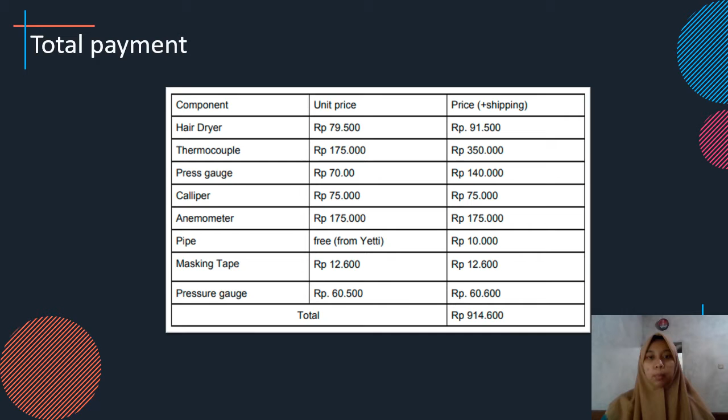As you can see in this table, this is the main component we use in our experiment. Most of them we purchased offline, especially the thermocouple, pressure gauge, caliper, and anemometer. From the table, there is the estimated price of each component with shipping costs. In total, we spent around 914,600 rupiahs. This cost excludes the shipping from one group member to another group member.

Then why did we choose a hairdryer for our experiment? Because a common hairdryer makes an excellent example of an open thermodynamic system. This figure shows the energy terms that are involved in the first law of thermodynamics. For a steady state condition, the total energy in must equal the total energy out.

In this lab, the students attempt to measure all of these energy terms and then compare the electrical work at different velocity and temperature. In our group, we did the experiment with different levels of velocity and temperature of the hair dryer. Basically, the hair dryer has 3 levels of speed and temperature. Because each of us has different electrical capacity in our house, we did it differently. I use the medium, Dara the high level, and Fitri the low level.

Second, the energy into the hairdryer includes the electrical work, the total enthalpy of the incoming air, and the kinetic energy of the incoming air, and there is heat transfer from the case to the ambient. This type of heat transfer is called convection. So for the heat transfer phenomenon, we will observe convection that happens inside the pipe.

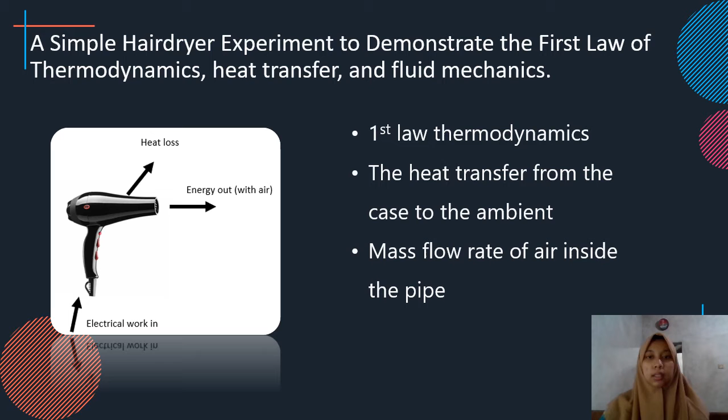Next, the energy out of the hair dryer is in the form of air. Then we will analyze the mass flow rate inside the pipe that will be installed on the hair dryer. As you can see in this picture, this is the assembly of our hair dryer experiment. We just need a hair dryer and a pipe.

And this is the step to assemble the hair dryer experiment. First we cut the pipe to 32 centimeters and then connect the pipe and the hair dryer using masking tape. If we want to measure the temperature, we install the thermocouple at this point 1, and the second thermocouple we put at point 2, and then switch on the electrical source.

When we want to measure the velocity, we first do not install the pipe because we want to measure the velocity at point 1 first. Then if we want to measure the velocity at point 2, we install the pipe again and measure the velocity at this point.

And then record the data and perform the calculation and analysis using the obtained data. I will explain it more clearly with the drawing design in the next slide. So this is the clear schematic drawing when we want to collect the data. As you can see from the two pictures, these are the way we do the experiment and collect the data

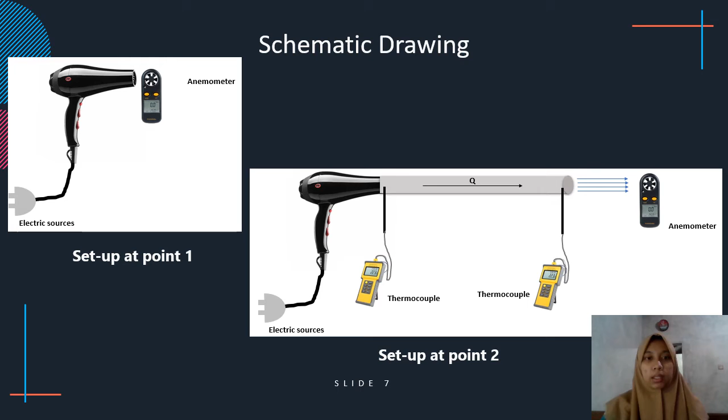Next is about measuring the pressure. So actually we bought a pressure gauge to measure the pressure, but when we tried it on the setup, it didn't work because we found that the pressure is too small. So my group discussed another method to measure the pressure and asked our lecturer about the method, and he said we can do that method. So our method is we have the formula pressure equal to force divided by cross-section area, while force is the multiplication of the mass and the acceleration of gravity.

Then our method is to measure the mass by putting some mass. Actually, we use rice above the hair dryer, so it looks like in this picture, and then we turn on the power, and then we take the rice little by little until the mass moves a little bit. Then we take the mass and measure it on the weighing scale. We take the data for point 1 and point 2 because the pressure of the air coming from the hair dryer may be different at point 1 and point 2.

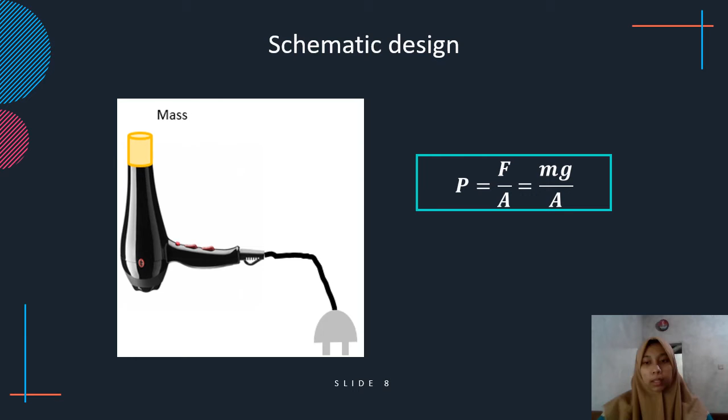Next is the principle of the experiment. So the experiment consists of three phenomena. First, thermodynamics. The principle used is the first law of thermodynamics, which states that in steady state condition, the energy in is equal to the energy out. And in this experiment, we will get some data collection to calculate the electrical power used for the hair dryer. And then the second is heat transfer. In the hair dryer, the heat is transferred by convection through the air. There is a temperature difference between 2 points, and from that we will calculate the heat transfer by convection.

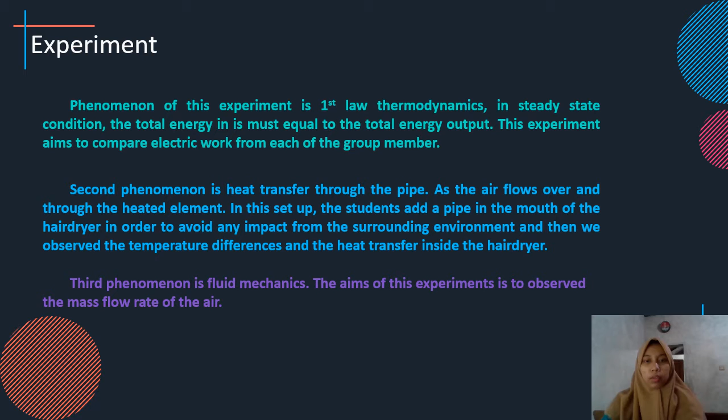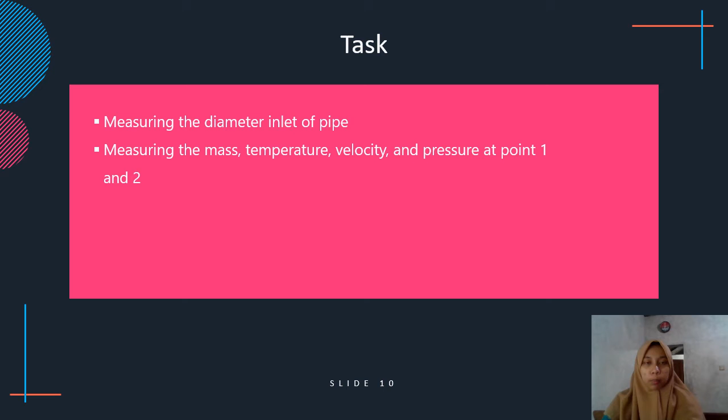Last, in fluid mechanics, the phenomenon that is going to be observed is the mass flow rate of the air. The parameters that are going to be measured are the velocity, area, temperature, and pressure of the inlet and outlet of the pipe. Thus, this experiment is to analyze the phenomena happening in the setup and collect data such as diameter of the pipe inlet and outlet, temperature, velocity, and pressure. Then from the three experiments, we will get data such as diameter of the inlet and outlet, mass of the rice to calculate the pressure, temperature at each point, velocity at each point, and as I said before, the pressure obtained from the force divided by the cross-section area.

And as you can see on this screen, the pressure at point 1 is 1159.4 Pascal, and then for point 2, 1034.53 Pascal.

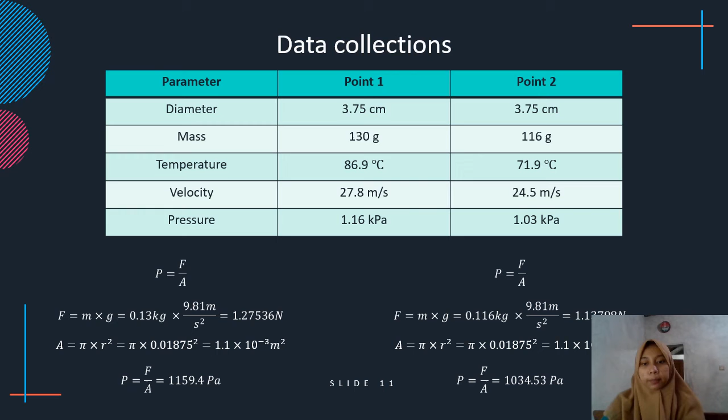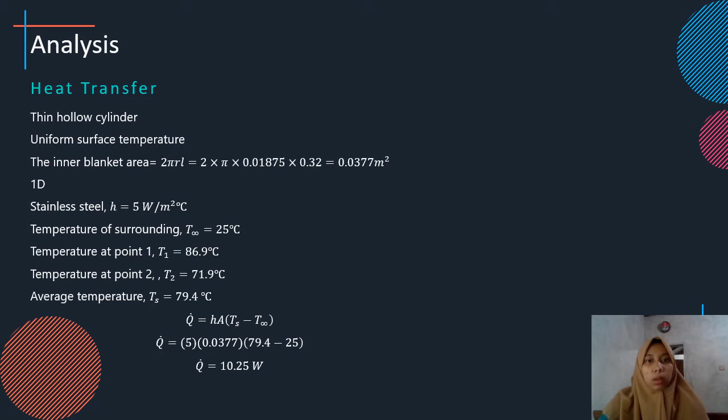We are in the analysis part for heat transfer. So, heat transfer occurs whenever there is a temperature difference, and in our experiment, we got that the temperature of the inlet and the outlet inside the pipe is different. The heat transfer happens by convection, when the hot air from the heat source flows through the air to the surroundings, which have low temperature compared with the heat source. And then from those variables we will calculate the heat transfer in the pipe by assuming it is a hollow cylinder, uniform surface temperature, and 1D.

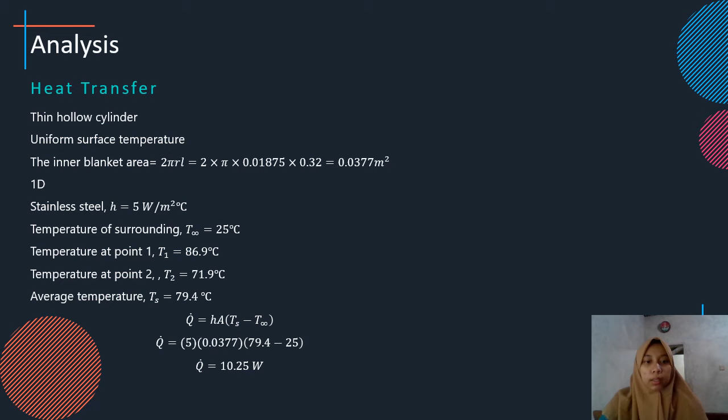As you can see in the screen, the heat transfer resulting from the experiment is about 10.25 watt. The next phenomenon we observe is the fluid experiment.

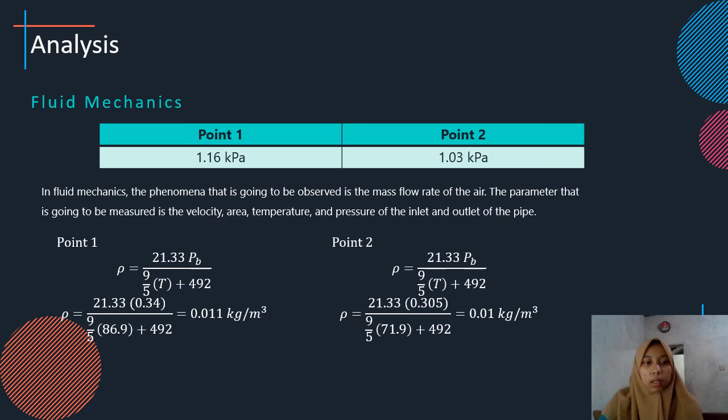We will calculate the mass flow rate. So the mass flow rate is defined as the rate of movement of liquid passing through a unit area. The mass flow is directly dependent on the density, velocity of liquid, and the area cross-section. Here you can see the data collection and the calculation of the mass flow rate. Then first we calculate the density from each point.

And then the mass flow rate in point 1, which is in the inlet, is higher than point 2 in the outlet part, because the mass flow rate is depending on the density. That's why the mass flow rate at point 1 is higher than point 2.

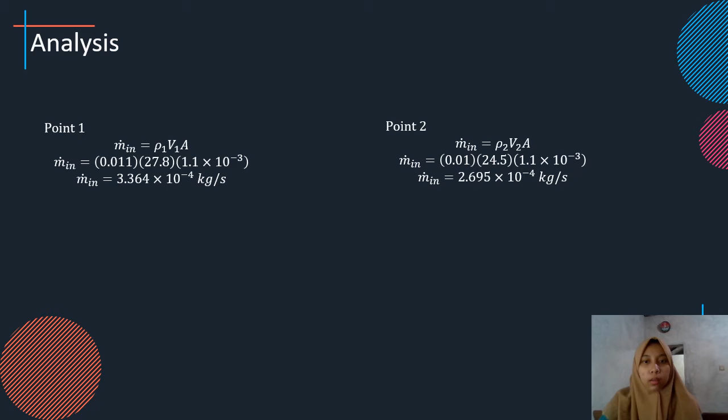The thermodynamic experiment. So the energy into the system has to equal the energy out for the steady state condition. From the conservation of mass, the mass in has to be equal to the mass out for steady state. This experiment requires the student to consider all of the energy terms associated with the hair dryer.

The energy going in includes the electric work, the total enthalpy of the incoming air, and the kinetic energy of the incoming air. Then the energy out includes the total enthalpy of the outgoing air and the kinetic energy of the outgoing air and any heat transfer from the gas to the ambient. In this equation, we neglect the potential energy.

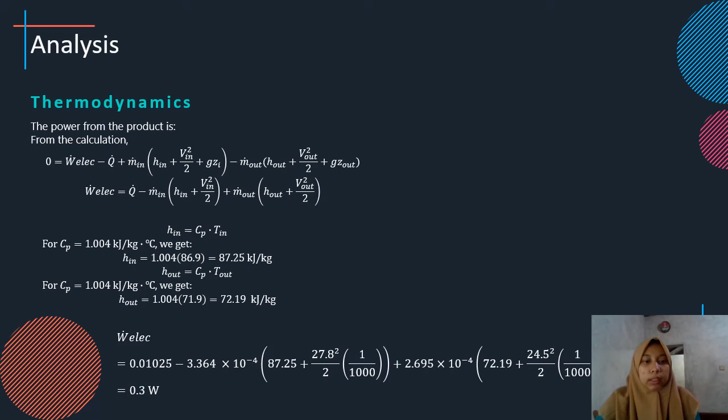So, in my calculation, according to the velocity and temperature level of my hair dryer, we get the electricity power is around 0.3 watt. As I said before, our level for the hair dryer is different. So Fitri takes low, me medium, and Dara high.

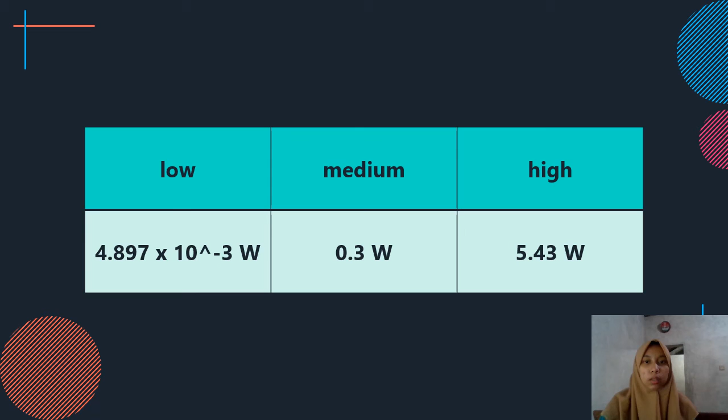So here is the comparison of the electricity power from different levels of hair dryer. So from the data result, it can be concluded that when the fan speed is increased, it requires more power, and increasing the outgoing temperature will also require more power too. So we are in the last part, which is the conclusion.

So this lab activity offered the student an excellent demonstration of heat transfer, fluid mechanics, and thermodynamics by setting up the setup independently with the group. Most of the instruments are available at Multi-Lab in Jogja and from the online shop. The students learn several things from this experiment. Primarily, they get a hands-on experiment with the first law of thermodynamics, heat transfer, and mass flow rate.

They get a sense of which terms in the energy equation are significant and which might be considered negligible. And then the temperature differences at different points and the mass flow rate inside the cylinder. From the experiment itself, it proved that high velocity and temperature will require more electricity power.

Second, the heat transfer by convection happens inside the pipe because there is a temperature difference between the 2 points of the pipe. Then last, the mass flow rate will be bigger when it has high density. Overall, the experiment went well and can be done individually in our home by following the instructions and safety rules.

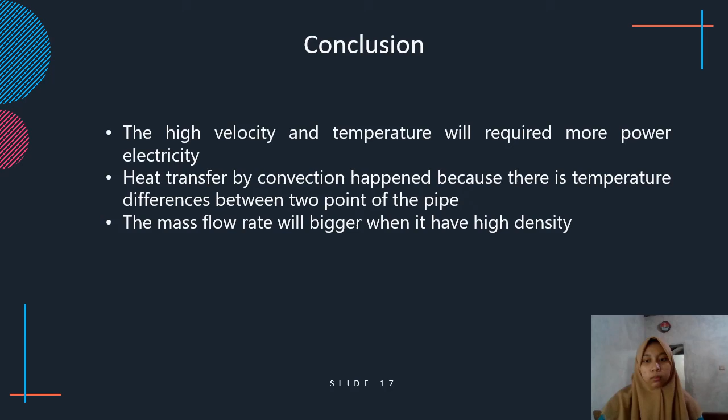Of course, this experiment was also monitored by the instructor because we must update every progress of our experiment. This also can build teamwork and communication skills along the group. Last, I will give feedback on this course. So for me, this course is very interesting and I'm enjoying this course.

Even though we can't do the experiment in the lab and cannot meet each other, since we are doing the experiment individually in our home, it is more challenging because we as a group have to create the module by ourselves and purchase it by ourselves, and it also helps the student to learn and show creativity to solve some problems in the experiment. Besides that, we have an instructor to help us if we don't have any idea how to solve the problem. That's all from me.